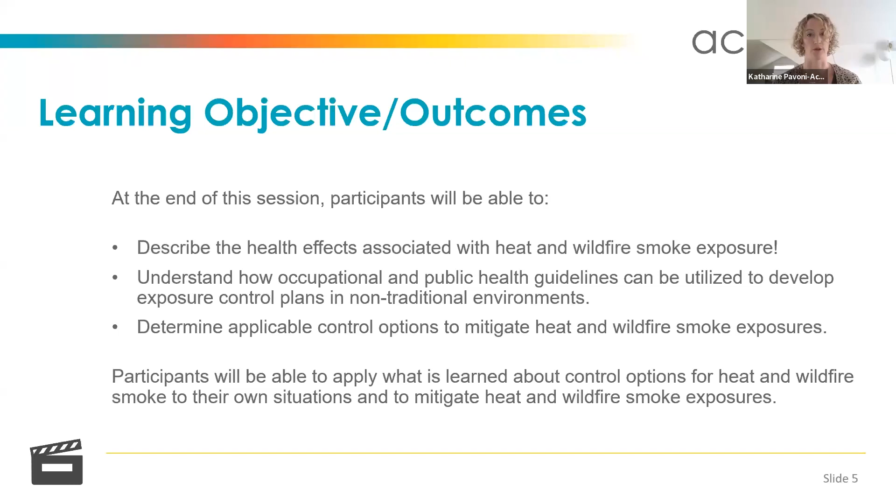Before I hand her the mic, just a quick overview of our objectives for the session today. We would like participants to be able to describe the health effects associated with heat and wildfire smoke exposure, understand how occupational and public health guidelines can be utilized to develop exposure control plans, or as we like to refer to them, ECPs, in our non-traditional environments that we work, and then determine applicable control options to mitigate those exposures. So our hope is that participants will be able to apply what is learned to their own situations and then mitigate exposure going forward. I will now pass the mic to Mona.

Thank you, Katharine. I'm glad to see such an interest in this topic. This is a topic near and dear to my heart. I've been working on heat stress and wildfire smoke for many years now. And as Katharine was saying, we've been working with the wildfire fighters in BC on a number of different studies. You might have seen an article about it today in the CBC News.

I would first like to acknowledge a couple of my co-authors on this presentation, Michael Cooper, who is out of Idaho. He and I presented a modified presentation to the American Industrial Hygiene Conference and Exposition down in Phoenix, and also Adrian Fung, who is one of my staff who helped put together the presentation. So thanks to those two. Okay.

So just to give you a little overview of where we're going today, I'm going to be talking about heat and wildfire, if you didn't get that from the title already. So we're going to talk about heat stress and wildfire smoke and how to assess it. We're going to do a bit of a comparison of different jurisdictions. It's not a full environmental scan. It's not every jurisdiction, of course, in North America. It's just giving you a little flavor of the differences, and there are a lot of differences in how people do things. And then I'm going to provide a couple of case studies on heat stress and wildfire smoke in the entertainment industry.

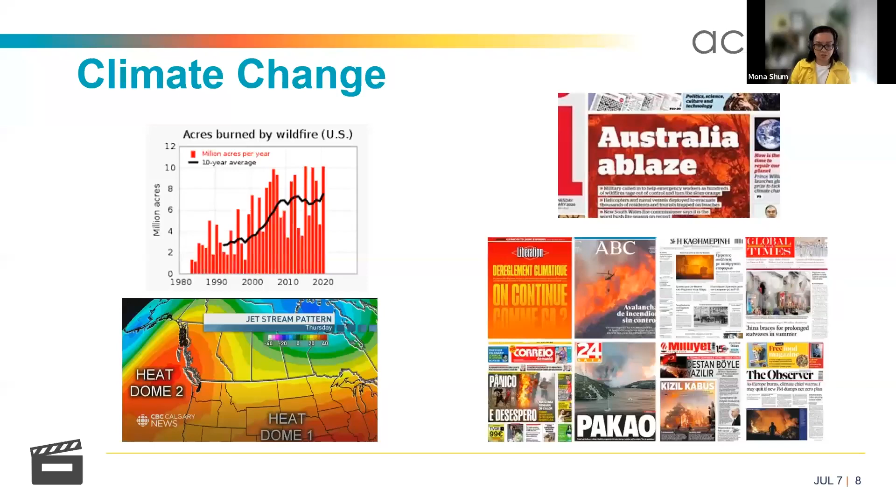So I'm not going to go too much into detail about heat stress. I think we all recognize that we, as humans, as mammals, like to be in a very narrow temperature range. And if we get outside of that, bad things happen.

So what can happen if we get too hot and we can't dissipate the heat is we can get things like heat cramps and rashes and dehydration and syncope, which is fainting, exhaustion, and then heat stroke, which can be a medical emergency. I'm sure many of you have experienced some or many of these health effects. I myself have experienced almost everything except luckily heat stroke.

And when I was in Phoenix, really ironically, we, the presenters, went out for lunch and we got lost walking around the Phoenix Convention Center. And I said, we can't all be hospitalized for heat exhaustion or heat stroke right before we're supposed to present on heat stress. We're all industrial hygienists, all know about heat stress, and we're out there almost suffering from it, but luckily we managed to get in an Uber.

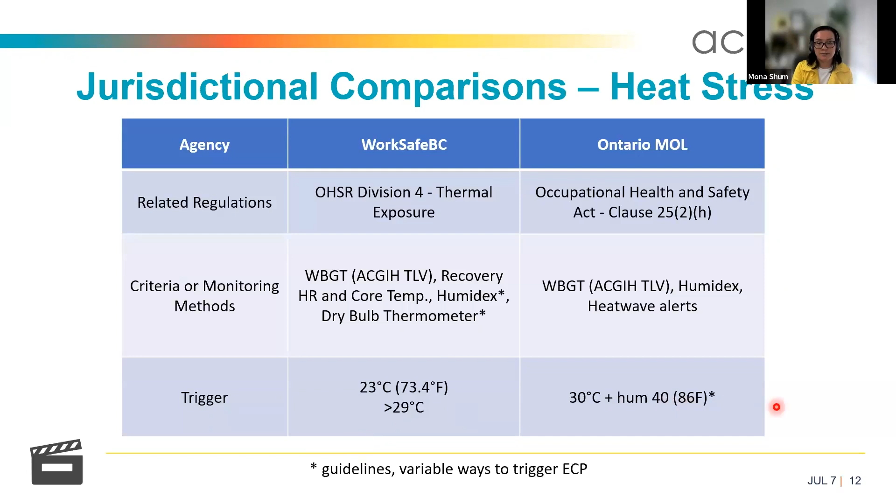So in the States, we only had a few states in here, Washington, Oregon, and California. They allow for dry bulb in Washington, but you don't have to record the temperatures. They all talk about supervisor training. Of course, we have supervisor training that's required as well. It's just not embedded in our heat guidelines, but they all say that in their heat guidelines. Their trigger temperatures are anywhere between like 32 degrees Celsius to about 27 degrees Celsius.

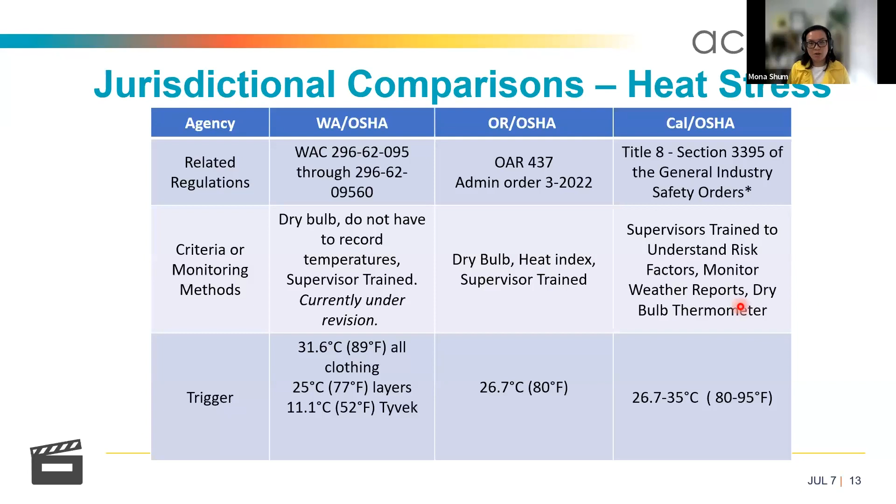And then Oregon also allows for dry bulb, and Cal OSHA allows for weather reports and dry bulb as well. So that's kind of all different. So we have a table here that represents those differences. You can see sort of acceptable methods for heat stress assessment, and they're all over the map.

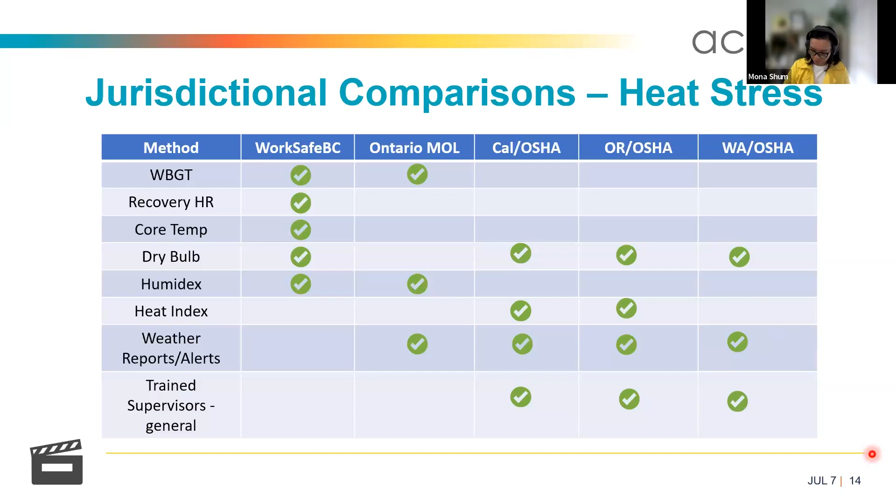So wildfire smoke. I just wanted to talk a little bit about the different constituents of it. So wildfire smoke is made up of a whole bunch of different things: carbon dioxide, carbon monoxide, combustion smoke, which consists of different types of smoke. So char is irregular carbon particles of unburned material.

These are airborne particles. Soot is that finer carbon material from incomplete combustion. And then ash is that burned cellulose material. It contains like minerals and oxides and metals. Also, there's these chemicals that can land on the surface of these carbon particles.

And a lot of them are probably or are known carcinogens. So the polycyclic aromatic hydrocarbons, like benzo[a]pyrene, for instance, are oftentimes on these particles.

And actually, we are looking at these polycyclic aromatic hydrocarbons, or PAHs, amongst the wildfire fighters. So this summer, we're actually waiting for a fire. It's kind of strange to say this, but we're waiting for a fire within about a 5-hour driving radius from us, because we have a lot of equipment. We have a freezer that we have to bring to site, etc. So we're waiting for a fire in our vicinity so that we can go out and start measuring for PAHs.

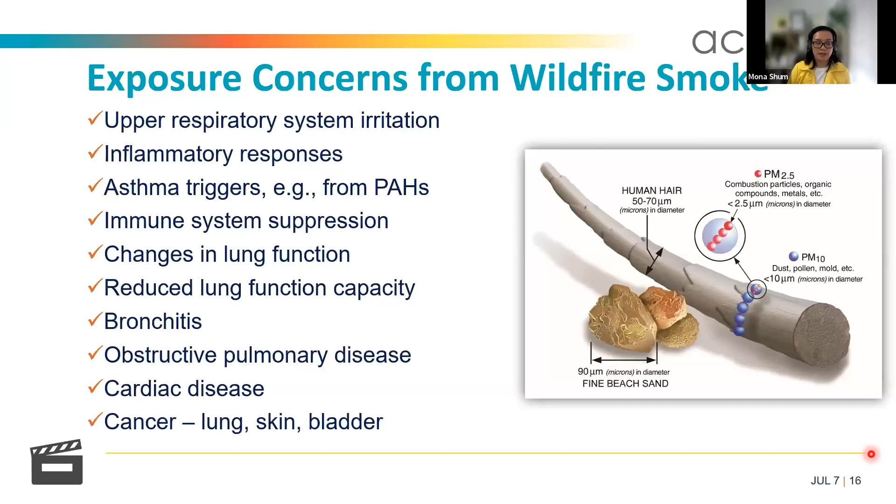So there's susceptible populations we know of: infants and young children, people with chronic respiratory conditions, pregnant women, persons with compromised immune systems, senior citizens. So we have a number of folks that we need to be particularly worried about.

And in this population of film and live events, we do have these susceptible populations, which are a little different from what we normally deal with as occupational hygienists. We oftentimes go to manufacturing facilities, oil and gas plants, mining, where we have a fairly healthy working population, right? So with the entertainment industry, we do have these groups that sometimes we normally don't have to consider.

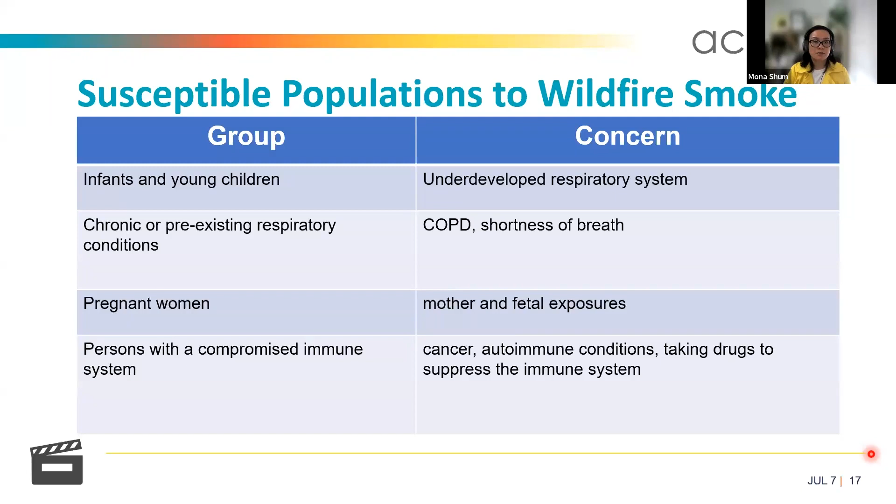Also, we've done things like looked at surface sampling of soot, for instance, and being able to see what that soot is related to. So oftentimes people, especially in the States, may make claims about wildfire smoke coming into their homes and then landing on all their furniture and ruining their contents. And so they'll be like, well, it was this external wildfire smoke that caused this issue. And then they want to get reimbursed for it.

So I was involved in one case where that was the case. They wanted to get the insurance company to pay for their belongings and their contents. And so I went in there and did some surface sampling, and then you can analyze the soot under a scanning electron microscope, and you can actually see the soot associated with other particles that are stuck to it. We could see that the soot was associated with this carnauba wax.

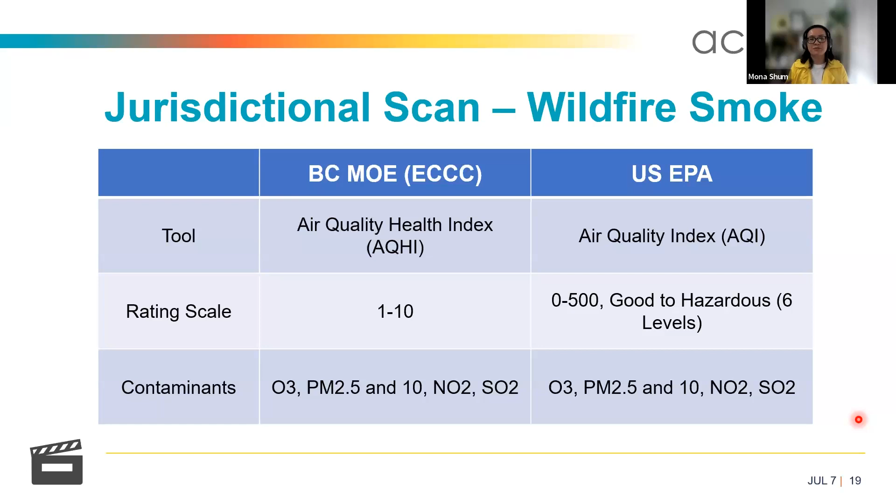So if you really want to know more about them, you can look them up a little bit more. But essentially, the AQHI in BC has a scale of 1 to 10. US EPA has a scale of 0 to 500, and it also categorizes them into 6 levels, from good to hazardous. The contaminants are the same. We're looking at ozone, PM 2.5 and 10, nitrogen dioxide and sulfur dioxide. So they're often the same. All these global indices around the world are often looking at the same types of contaminants, different rating scales, though. So we need to pay attention to those.

So as I was saying, these occupational exposure limits are lacking. So we do rely on these ambient air quality standards. And the ambient air quality standards are for the general public. In this case, they might be very fitting for some of the vulnerable populations that we're dealing with, right? What is lucky about BC is we actually have a wildfire smoke specific ambient air quality standard. So when it gets smoky, the government says, hey, we're going to start to use this AQHI plus, which is like the AQHI on steroids, I guess. They use the PM 2.5 measurements, and then they give it an AQHI.

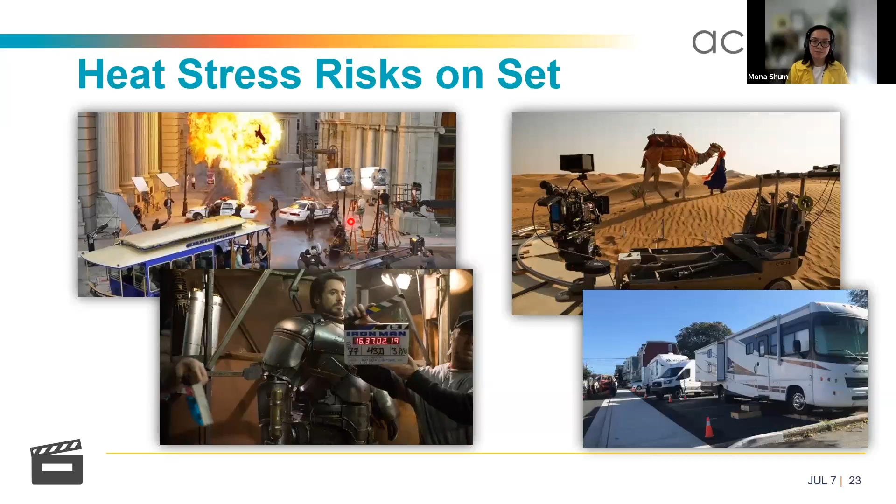So I was out at an event, and it wasn't even that hot. It was April, end of April, and there was someone sitting in the front in the sun, directly in the sun, for about 2 hours, and then they fainted. And the first aid attendant who came was saying this happens all the time. So it is an issue that live events need to face as well, and more so now.

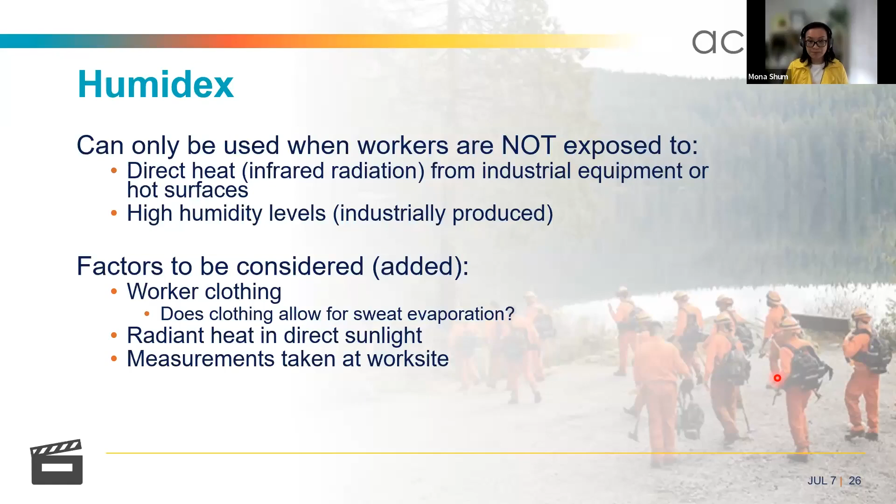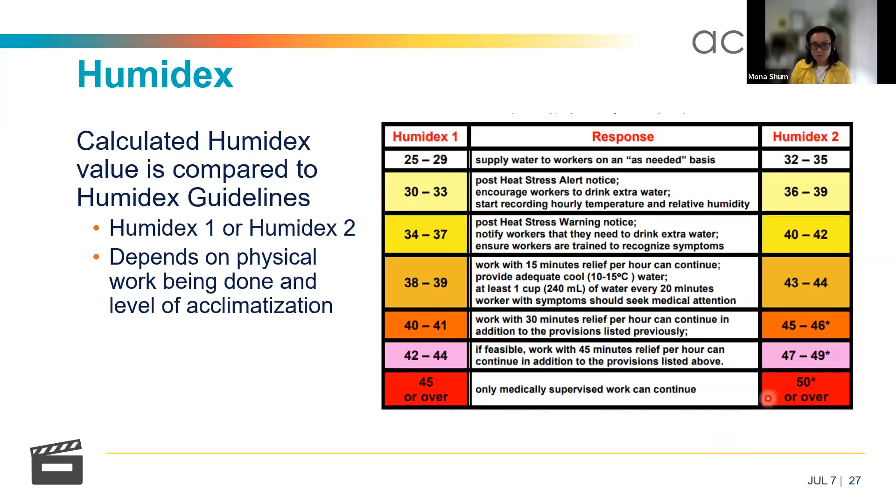So there are some heat stress apps out there. So many of you might know about the OSHA heat safety tool. So this is one where it looks at temperature and relative humidity and gives you like a feels like temperature. So there's also this new one now that we developed with IATSE 891 with the Humidex method.

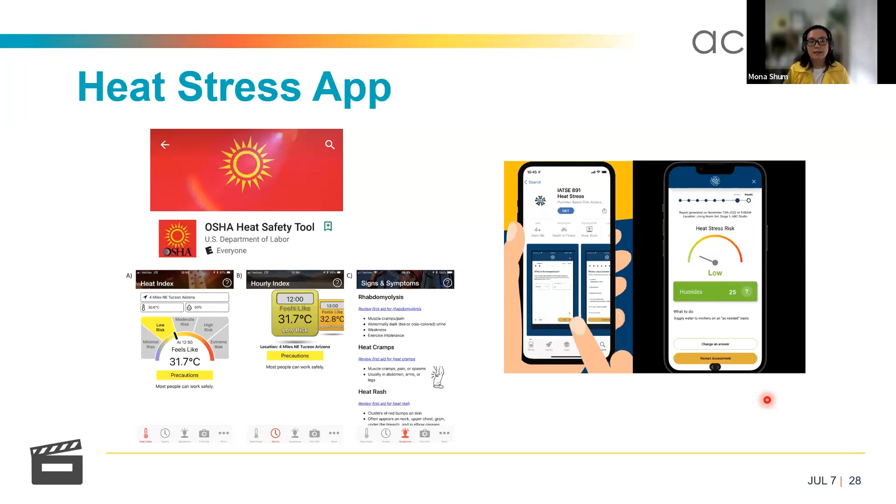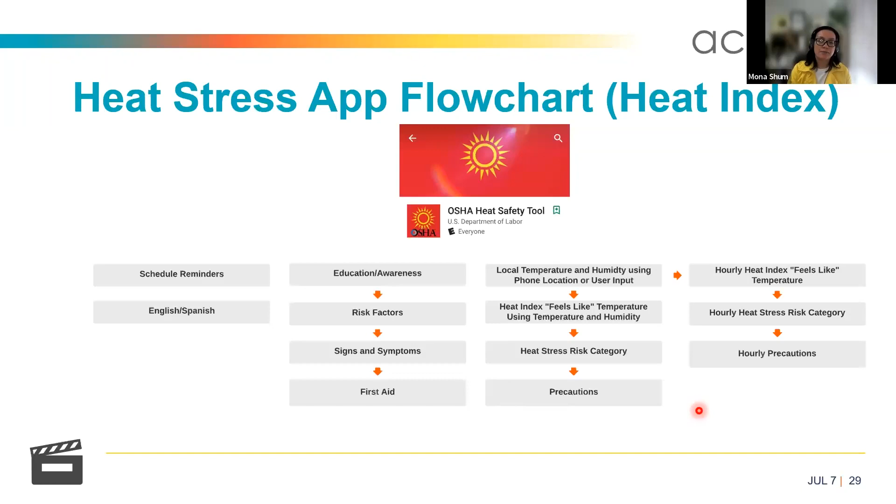So the heat index method with the OSHA tool is really quite nice. It gives you schedules, reminders. It's in English and Spanish. It gives you education and risk factors, signs and symptoms, and even first aid information. It allows for local temperature and humidity to be put in using phone location. So it does allow for you to use your weather app, for instance, and it gives you this feels like temperature and humidity, and gives you a risk category and then precautions to take.

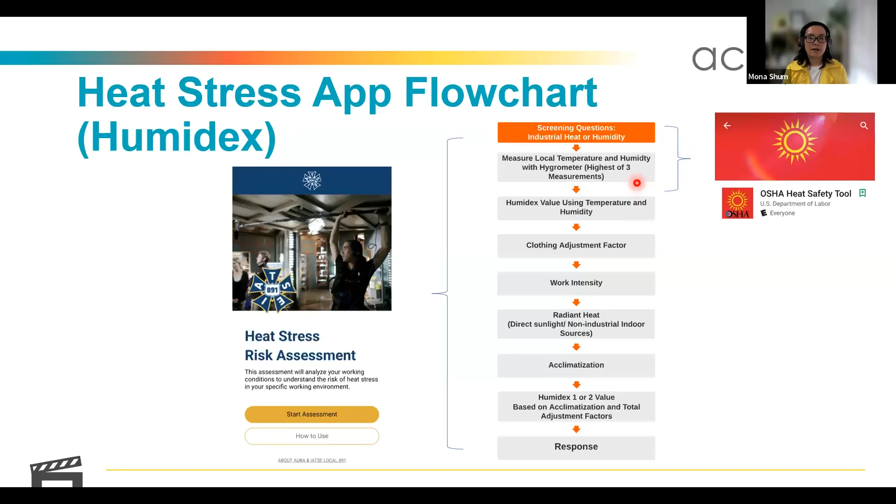So the IATSE app has that first bit as well. So you can see the OSHA tool sort of ends at this level. What's different too is our app says you need to have a hygrometer or some way to get your own temperature and relative humidity at your site. So OSHA's tool sort of ends here, gives you a feels like temperature, whereas the IATSE tool actually keeps going and it asks you about clothing, work intensity, radiant heat.

Acclimatization actually is not asked here, although it's built into the app, because IATSE was saying we just want to default to unacclimatized workers, because for the most part in Vancouver and Lower Mainland, we don't ever really get acclimatized. So we just took that question out. And then it gives you this Humidex 1 or 2 value, and then gives you a response.

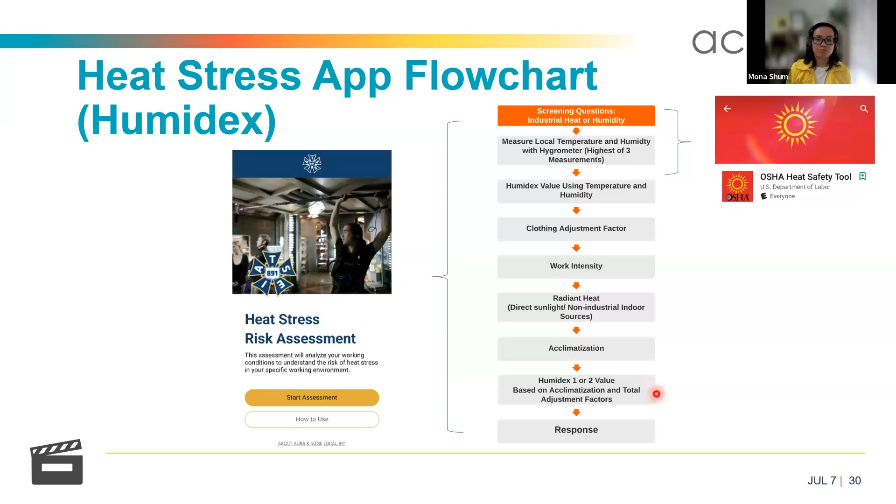So right now, I invite you all to open the app and sort of follow along as we go through. And you don't have to if you don't have a phone. I don't know who doesn't have a phone, but if you don't want to follow along, you don't have to follow along. I will explain as we go through, but it'd be nice if you did sort of follow along.

So you can actually go into background. I'm going to actually follow along myself. And you can take a look at where this app came from and a little bit about it. You can actually read some technical details about it too, if you're really curious about how we came up with our assumptions and things like that. And then you can go to the assessment.

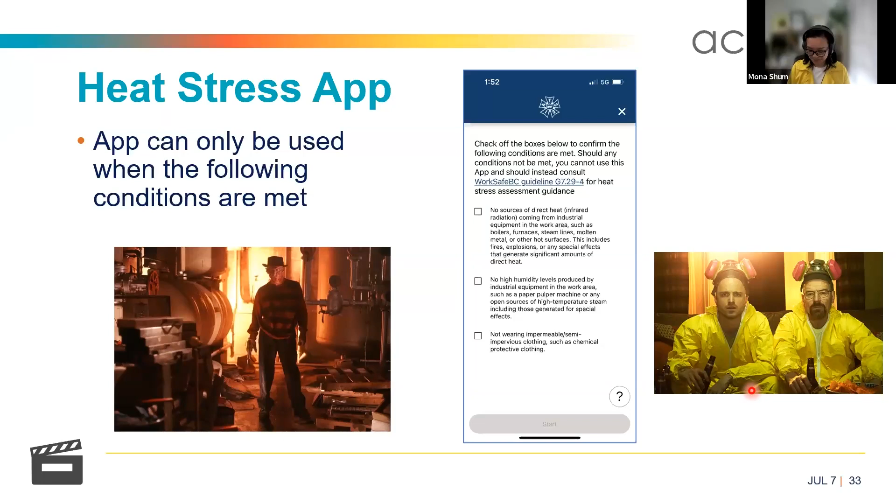And the first thing we have to do is say that we're not in these conditions. So you're not in direct infrared heat coming from industrial sources, no really high humidity levels from a pulp and paper mill, and you're not wearing impermeable or semi-impervious clothing. So this clothing that the Breaking Bad boys are wearing right now, you cannot be wearing that. So unfortunately for them, they cannot use the heat stress app.

So then you click all the boxes and you go to the next screen, you'll see location. So if you go into location, you can put down where you are. And this helps because at the very end, there's this screen that shows where you are and what time you did this assessment. So you can actually screenshot it. So it's a nice thing. So please put in something about where you are. It can be anything.

And then your temperature. So put in your temperature that you're at, or you can guess as to what you're at, and then the relative humidity, you can put in that, and then you can keep going. The temperature can be done in Celsius or Fahrenheit for our American friends.

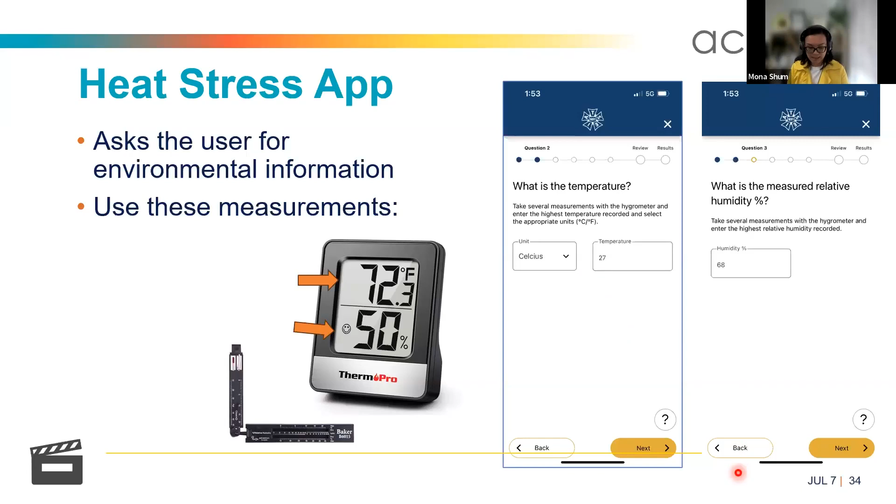And then it asks about clothing. And I get a lot of comments about this one, and they say, well, why don't you have more clothing that's pertinent to the entertainment industry? We don't often wear coveralls and things like that. And the reason why it's kept this way is because it's in the WorkSafe guidelines.

We didn't want to stray from that because these clothing items have real evidence to provide an additional number of degrees, right? So you're adding 5 degrees Celsius for coveralls over summer clothes. People have done a lot of research on that, and WorkSafe is agreeing to that, right? So I didn't want to sort of go, oh, well, coveralls are similar to an overcoat. I didn't want to make that decision, but we are asking you to use your best judgment.

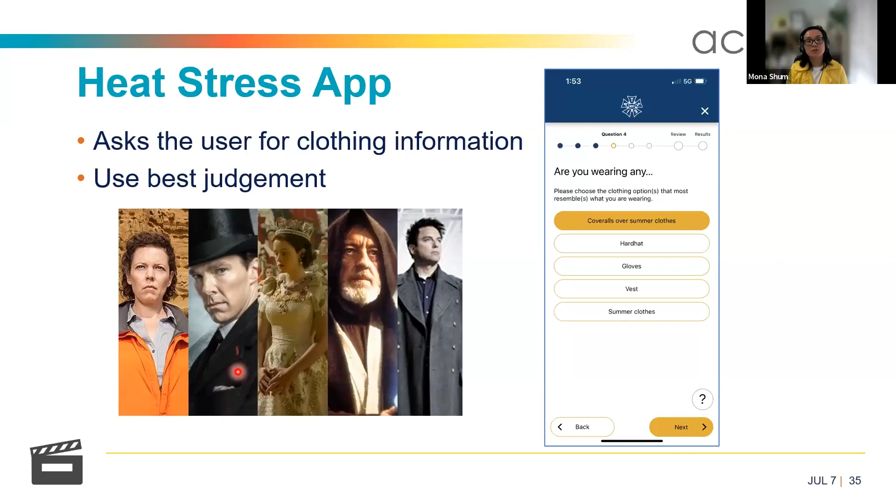So for these characters here, I want you to go through one or more of them and just choose a character and say, hey, what do you think? Are they wearing coveralls over summer clothes? Would you consider a hard hat or a hat to be similar? Gloves, vests. Summer clothes are considered light clothing: light shirt, pants, socks, underwear, and shoes. So anything more than that would be considered an addition.

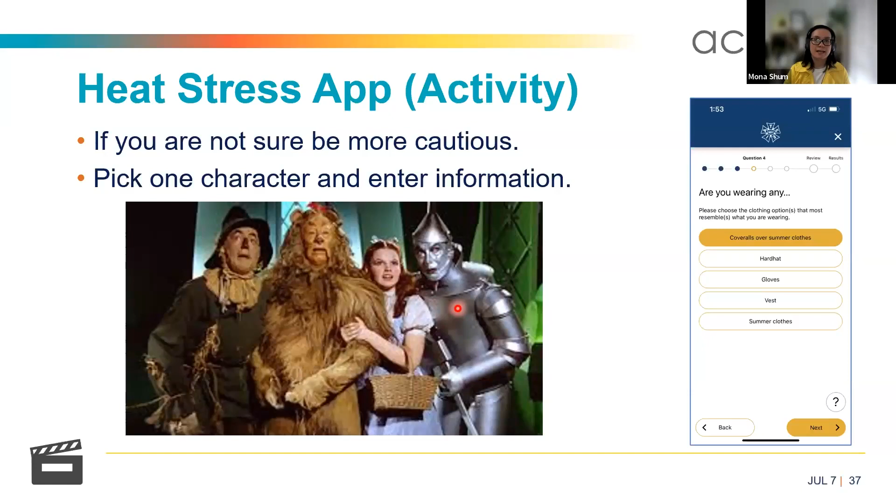The Tin Man though, he's wearing impervious clothing, right? So this one I would say you can't use. Tin Man cannot use this heat stress app.

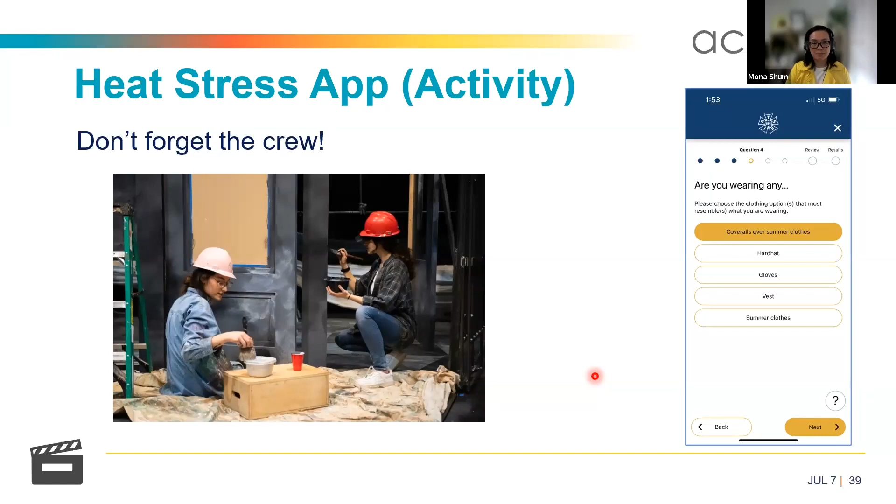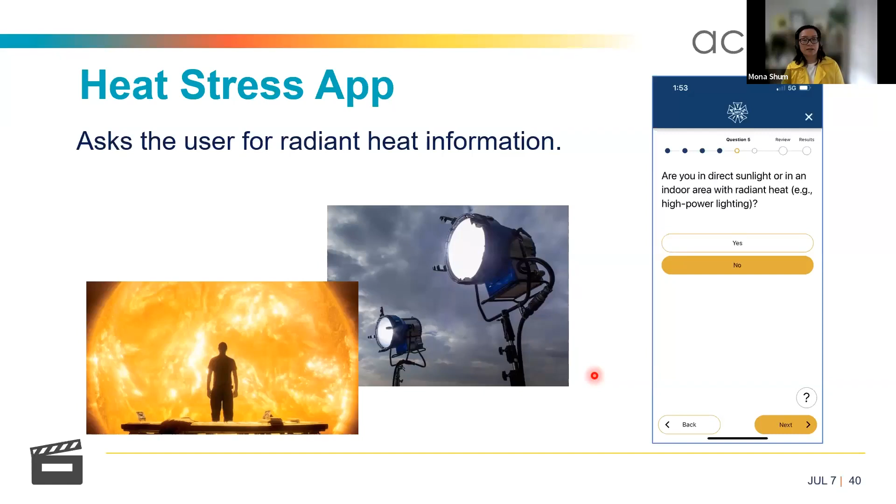So let's move on to the next one, which is really asking about, are you in direct sunlight or an indoor area with radiant heat? And that could be high powered lighting as well. So that's really pertinent for people who are in the entertainment industry, on production, etc. So you can say yes or no.

And then it talks a bit about your activity level. So are you resting? Are you just doing some sitting with some manual work? Or are you running? Are you doing something at maximum capacity? So there's a sliding scale you can utilize from light to very heavy, and you can choose which activity level you're doing.

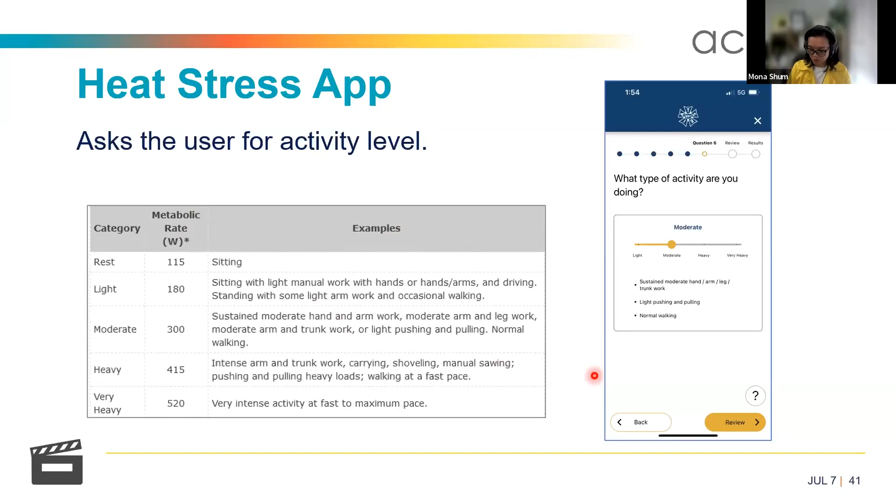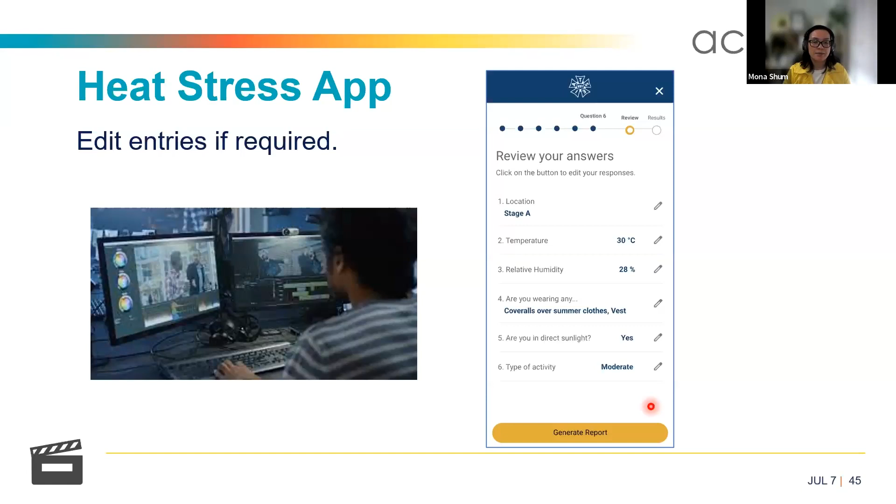And then you can edit. So you go to the next page and then you can edit anything you want. You can go in here. This is where I've sometimes played with the app to check things. It's really simple to just press that little pencil and then go and change it, change the temperature, change the relative humidity, and then do it again, generate a report.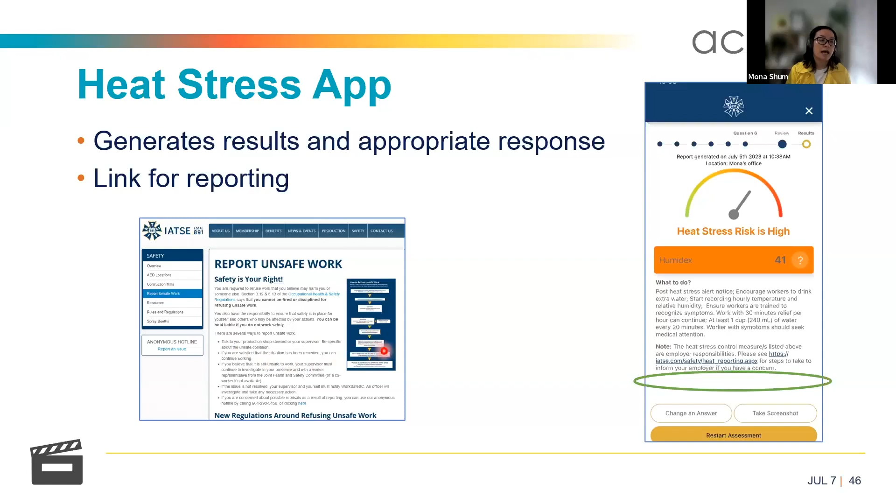Also, there's a website that it goes to, and it'll pop up this IATSE 891, how to report unsafe work, and you can go in there for more information. So those controls that you noted there were actually just from WorkSafe BC. So we've just included these controls here for the different humidex ratings.

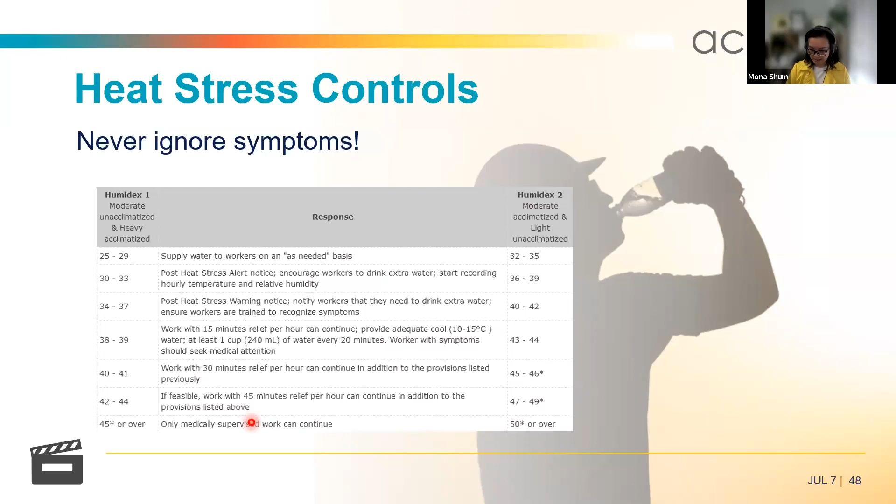So really, it's a quick and easy screening tool. It can only be used under certain conditions. But of course, you never ignore your heat stress symptoms, even if the heat stress app says it's low risk. You should never ignore your symptoms. And it also requires some education and training around it.

So I know that IATSE 891 has purchased 200 of these hygrometers. They got them off Amazon. We helped choose them for them. They actually branded them too, and they're providing it to their members.

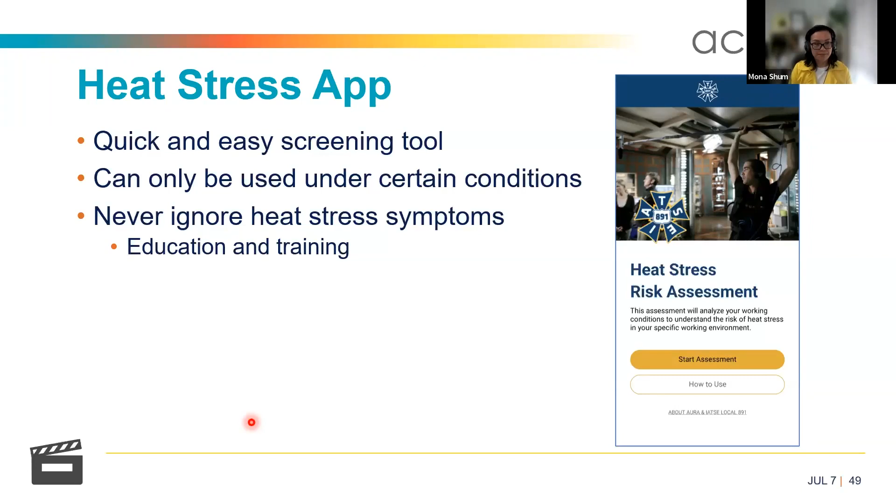So we're going to move on to wildfire smoke now. I know some of you indicated you're having some questions or issues with that. We can address those after the session. So wildfire smoke. In BC, it's mostly a summer issue. In other places, though, it's not just a summer issue anymore. And of course, it affects not only outdoor filming and live events, but also indoor. And at times we have these vulnerable populations. And like I was saying before, there's no clear occupational guidelines or limits.

So we were asked actually to put together some heat stress and wildfire smoke exposure control plans. And as for heat stress plans, Actsafe has a nice template available on their website where you can download a Word document that you can actually modify. And it's a really nice sort of basics of what goes into an exposure control plan for heat.

For wildfire smoke, it's not really something that people are doing much of right now, but I was asked by production to do that for them. And that's where we came up with all the AQHI and looked at different levels and controls that they would do at certain AQHI readings.

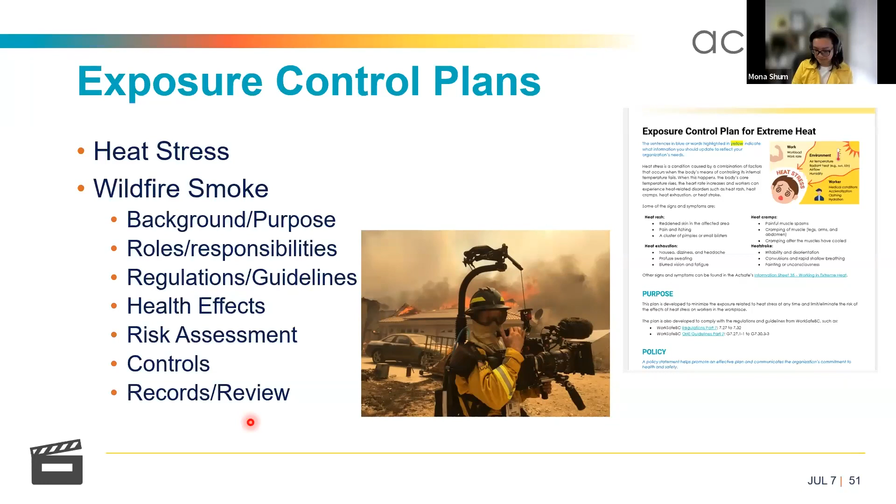So this is just an example of what that exposure control plan had. So they had some actions that were required when AQHI was 7 or greater. Of course, every production might have different needs and different actions, but they had certain things that they had to implement at that time.

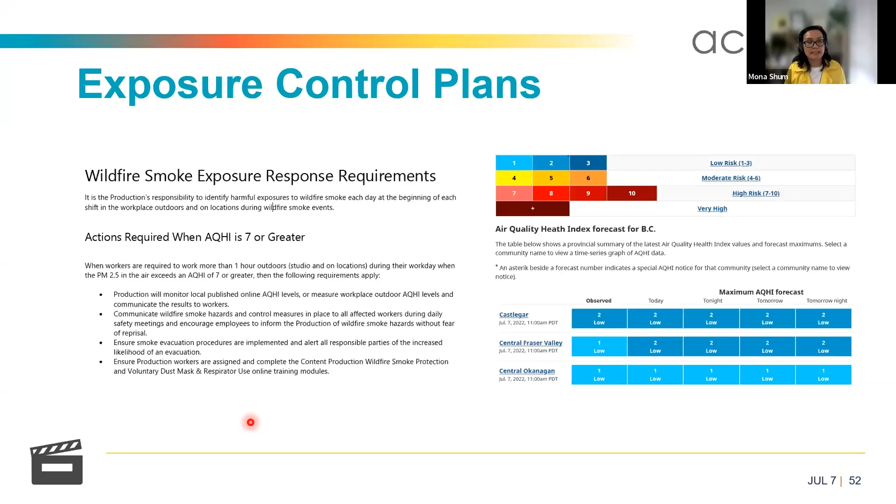So how do you get at this current air quality information? So I'm going to ask everyone to go to their weather app on their phones. And you can actually find a lot of information on the weather app itself. So if you were to go into, I'm in Vancouver right now, Burnaby, you'll see a screen like this, right? And just look for the air quality section, which is right below all the temperatures.

So you can see here, today I'm seeing 1, low risk. And then you click into that. And if you click into that, you'll get into the next screen, which is a black screen.

And then it'll actually say the air quality index is X, which is better than yesterday or worse than yesterday. It'll say it's ideal air quality for outdoor activities. And then they'll also say what the main contaminant is. So it's nitrogen oxides today, typically coming from traffic. So that's really good information.

If you looked up another country, so if you looked up America somewhere, Phoenix, I was in Phoenix, you can do that too, and you can see the air quality index comes up. So it's a different scale. And if you looked up Beijing, you would see a different scale there too. But the weather app is great for giving you some real simple summary information.

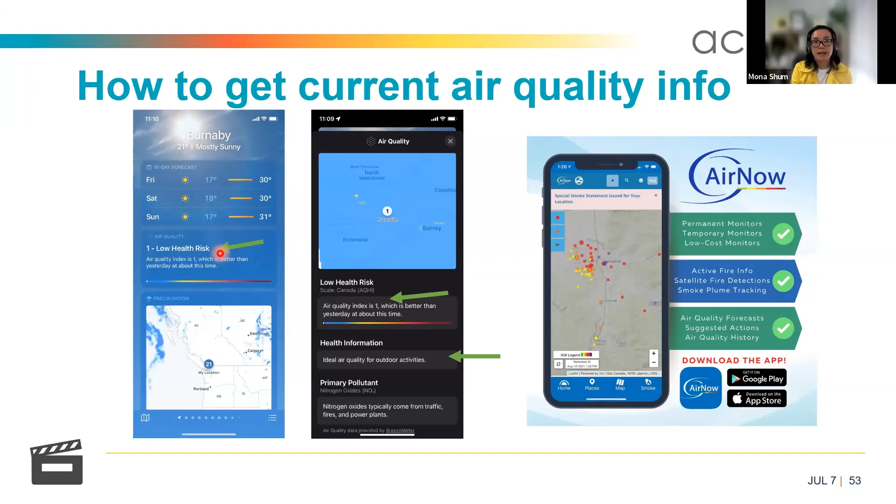You can also download the actual apps for each of those indices. So the AirNow for the EPA AQI, you can download a separate app for that. You can download a separate app for AQHI and get more information from WeatherCan.

But really what it's about is thinking about AQHI and thinking about how we're going to deal with wildfire smoke ahead of time. So when we're doing these call sheets, for instance, for productions, we might want to consider AQHI. I know right now a lot of people have weather on there, like temperature, and they'll have conditions, whether it's cloudy or sunny, etc. Maybe we need to add AQHI to those call sheets.

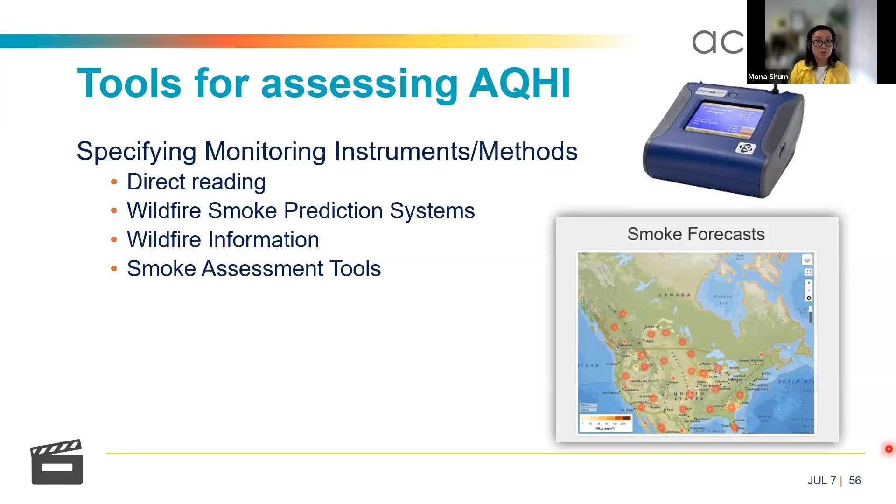For this production in particular, they wanted to also do some direct reading measurements. So they wanted to use something like this, like a DustTrak, to actually measure the PM 2.5 when it was smoky. There's different tools you can use, like this direct reading instrument, and then you can compare to the PM 2.5 levels that are given in the AQHI plus chart here, and you can say, oh, I'm getting, let's say, 65 micrograms per cubic meter.

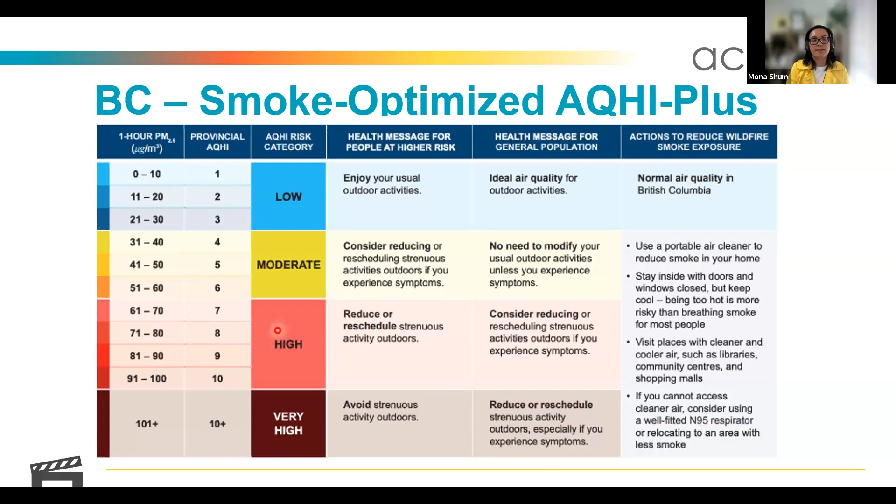That falls in here. That's a 7. That's a high risk. And then for me, I have a plan already created at 7. We are going to start implementing this, that, and that, and they can be specific to your workplace.

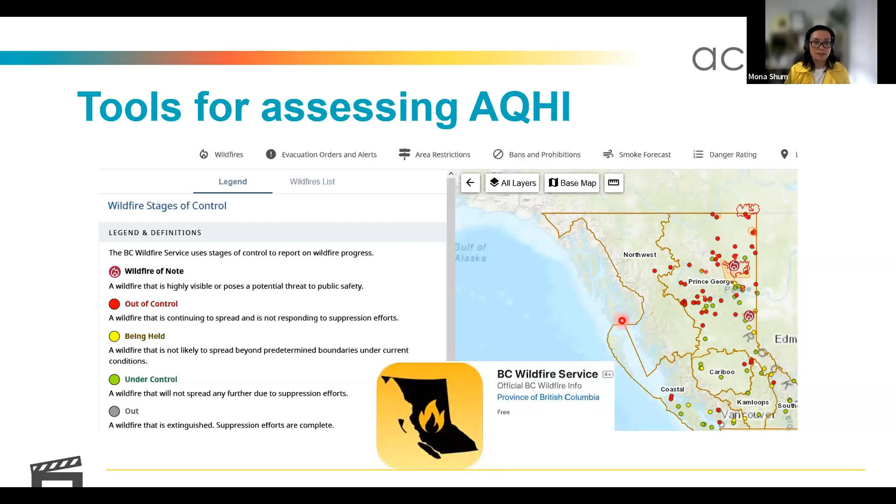There's also other tools for helping with assessing the air quality. So we have this BC Wildfire Service app on our phones. We're noting where all the fires are because we want to be able to determine whether there's a fire creeping up in our vicinity. So we're watching that quite closely. But if you're doing a production or a live event somewhere, you may want to look at this wildfire map just to see where all the wildfires are and whether they're in close proximity to you.

There's also other websites you can go to, like gov.bc.ca. They have information on PM 2.5. So you can actually look up PM 2.5 and you can find a whole bunch of little dots, and you can look at them and see where the air stations are.

So there's a number of different methods for looking at AQHI. You can actually do routine monitoring with a real monitor, but there's strengths and weaknesses to doing that as well. So we want to make sure that we consider those strengths and limitations, right? So routine monitoring is great because you're actually doing it at the place of work. Remote sensing, relying on some of those air monitoring stations, can be helpful as well, but it might not give you right where you're at. It might be at different elevations and things like that, so it might not be exactly what you're experiencing, but it's probably a good way of screening.

And then forecast modeling is trying to predict where the fire is going to be going. That's a little harder. You need some expertise to be able to do that, but people sometimes need to do that when they're predicting where they're going to be putting a production or a live event. Fire proximity or smoke fire information, where I was talking about the BC wildfire map. That one's a good one just to see where the fires are. It's not really proportional to smoke, and we don't know which direction it's going in and all those sorts of things. There's a number of different things you'd have to look at other than just proximity to wildfire.

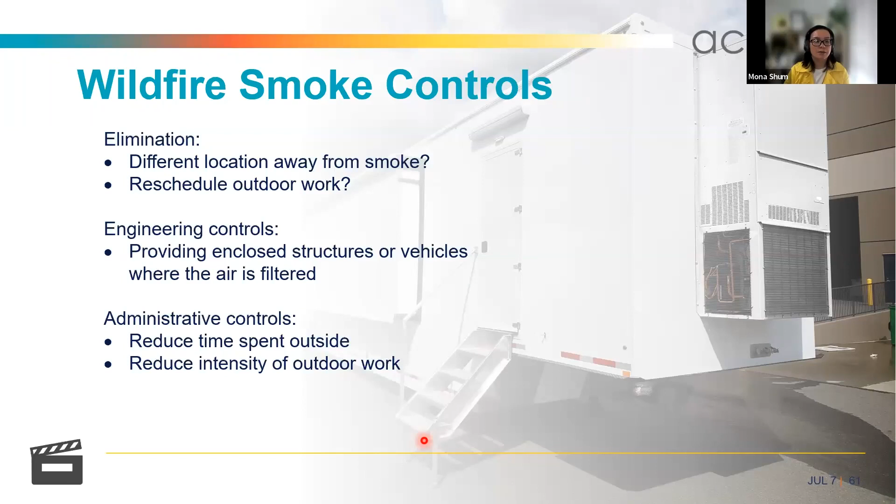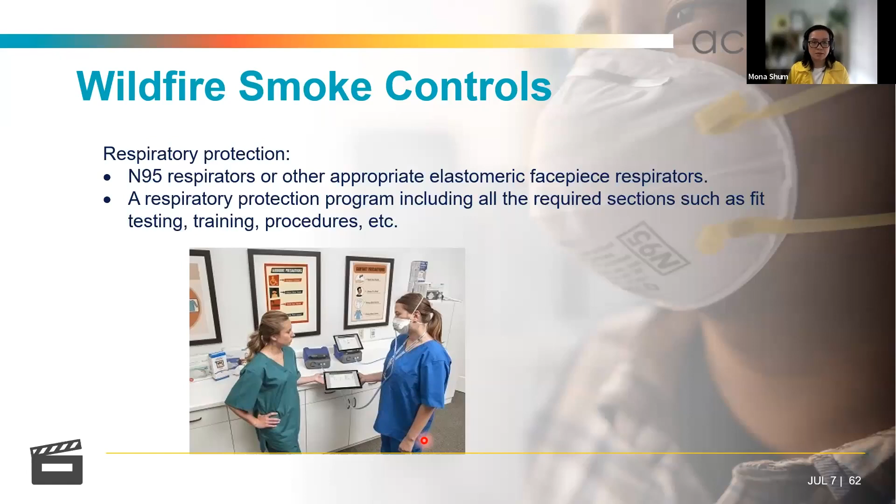For engineering controls, perhaps we can provide some enclosed structures or vehicles where the air is filtered, reduce time spent outside, reduce intensity of the work outside. And then potentially use N95 respirators or other types of respirators if the work can't be readjusted or rescheduled. But of course, if you're going to do that, you'll need a respiratory protection program and all the education and training required there.

But just because you're not outdoors doesn't mean you don't get exposure to smoke. You could get indoor exposure to smoke from infiltration. So we're often asked to sample indoors. Well, hey, is the smoke coming? Well, we can smell the smoke coming in. Is it bad for us? And so they ask us to do some measurements. And so there are certain things we can measure, but certain things we can't.

So for temperature and relative humidity, for like heat and things like that, we can definitely do that and see what the comfort levels are. We can measure things like CO2 and carbon monoxide. We can measure volatile organic compounds and even fire-specific volatile organic compounds. Now, usually it's not a cheap thing to do, and it's not a quick thing to do if you're looking at fire VOC markers.

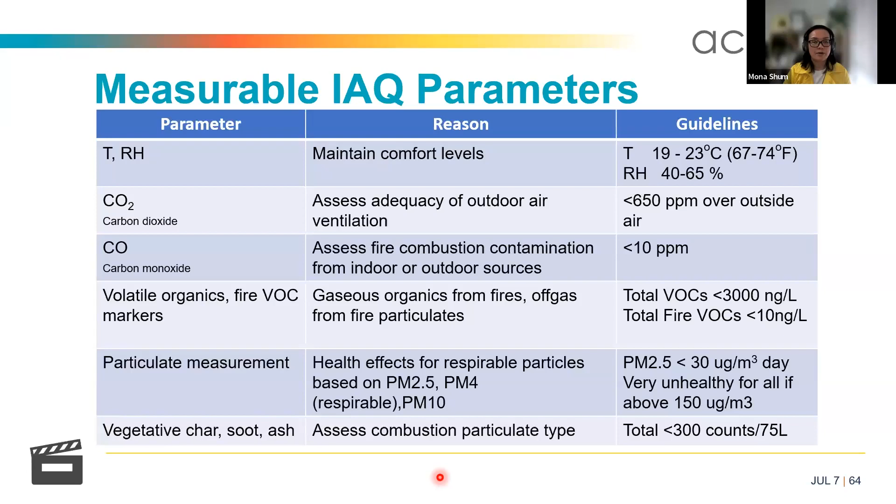We can also look at particles themselves. We can look at PM2.5 and PM4 and PM10 and see what the concentrations are indoors to see if they're above limits and things like that. Again, we can look at vegetative char and soot and ash. We can look at the type of combustion and determine whether that air is coming in with smoke in it.

So there's different pathways, and of course we know the common ones, which are your windows and doors, but also, we don't think about it, but foot traffic, you could bring in particulate from shoes and clothing as well. You can get a lot of sort of leakage in your building. So in the summertime in buildings, we have what's called a stack effect. So heat will rise, right? So warm air will rise.

So what happens with that in a building, you'll get heat rising, and it causes this suction of air from the lower parts of the building. So any kind of holes or any kind of leaky areas that you have, that air is coming in and going up and out, right? So it's doing this, what's called the stack effect, and therefore you're bringing in a lot of unconditioned air. So hot air, possibly, and smoky air that's not at all filtered or conditioned.

So that is an issue, especially for residential homes, but also for workplaces as well that don't have proper mechanical systems, which oftentimes I know in the film industry, we utilize warehouses and things like that. So they can be leaky, doors are opened all the time.

So air can come in, and it's difficult sometimes to deal with both the heat and the wildfire, because sometimes those two are contradictory to each other, right? You don't want to bring in wildfire smoke, right? But you might want to bring in some cooler air to cool the indoors. And so those things are sort of contradictory sometimes.

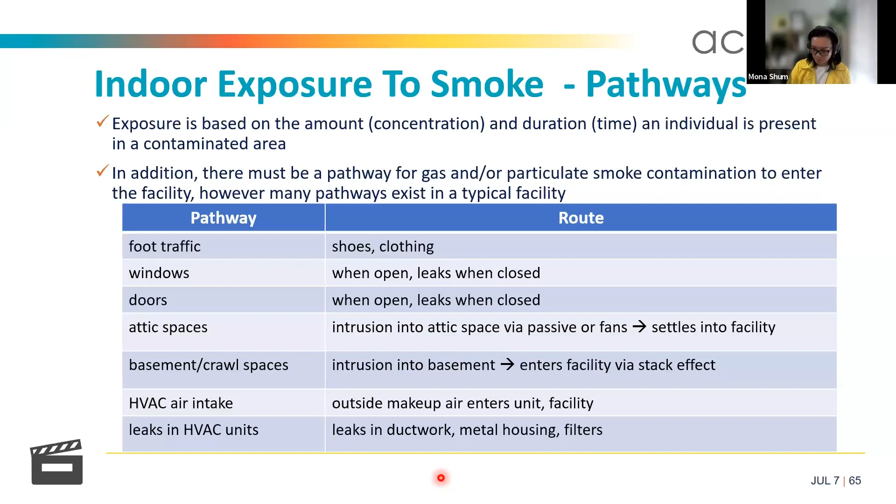So people ask us all the time, is it safe? Is it safe inside then? And it's a difficult question to answer. So unfortunately, there's no one chemical or particulate test you can do to determine if the building is safe or unsafe or will cause health effects in a given facility. However, you can collect data to sort of say what's there and how much there is, and we can look at what levels we can compare it to. And then we can also look at sort of remediation or cleaning effectiveness.

So we can actually say, okay, well, we were involved in, for instance, a warehouse that was having an issue, and they said all the smoke came in, and we smell the smoke, and it seems to have affected our warehouse materials. So, you know, after they cleaned up and after they were able to flush the air, etc., you can come in and do another test, and you can see that it's much cleaner.

Now, what are the standards around that? That's another question. So sometimes it's difficult to answer this question about safe versus unsafe. And a lot of times experience and professional judgment must be applied.

So here are some things for controls. We don't want to open unfiltered HVAC air intake dampers in a wildfire smoke situation. In that case, we'd want to close them. But then, of course, that causes issues too with getting enough fresh air. We want to keep windows closed. However, if you do have an HVAC fan with a good filter on the HVAC unit, then we do want to bring in that clean air through that filter, and you want to bring in that fresh air.